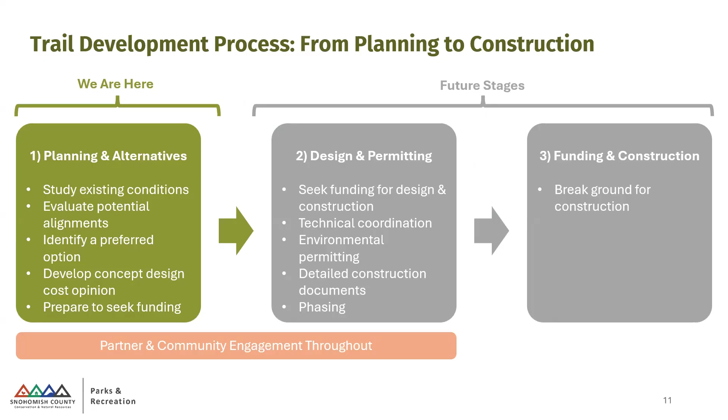So what is the vision for this trail? The county and its partners are seeing this trail as something that can serve for both recreation and active travel. A trail that connects people to nature and scenic views and important destinations, and a trail that respects neighbors, farms, and local businesses. What other things do you think should be a part of this project vision?

I think our next poll is, so actually first we're asking you to rank those in order of importance.

All right, let's see if I can interpret this. Can't share the poll yet, but the little slider bars are moving around. It's actually looking pretty even right now. All three are looking pretty even. Maybe a trail that respects neighbors, farms, and local businesses is a little ahead. I'm not able to share it yet. We'll move on. Oh, here we go, share results.

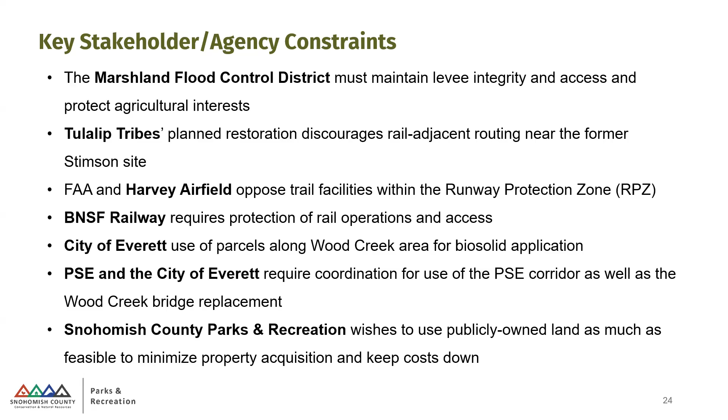So that was a lot. I'll pause here and see if people have questions on the content we've presented so far. In the next phase, we'll jump into talking about the actual alignments. But if you have any questions about what we've covered, put those in the chat and Dustin will help field those.

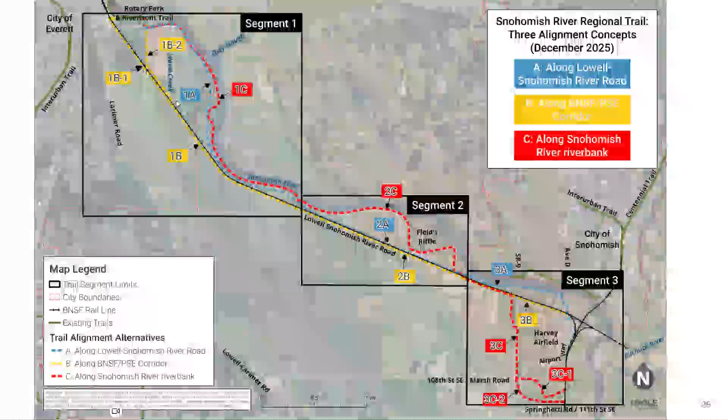I forgot to give you an overview. There's Rotary Park up above, and there's that bridge I mentioned that the city is planning to update. One of the big issues we have is a crossing there — if we went this way, we would need to cross that stream. Then coming along here, SR9 is down here, then Harvey Airfield, and crossing over into Snohomish.

So we're talking about potentially a trail along a roadway — what we'd call a side path — a trail along the river, and a trail in areas that might have sensitive areas. The cross section of the trail would differ depending on location, so we included a few cross sections to give you a sense of what it might look like. There are standards we'd follow, and we'd want as wide a trail as possible while fitting it into the context. So whether that's land use constraints or critical area restraints, the trail width would flex to respond to local conditions.

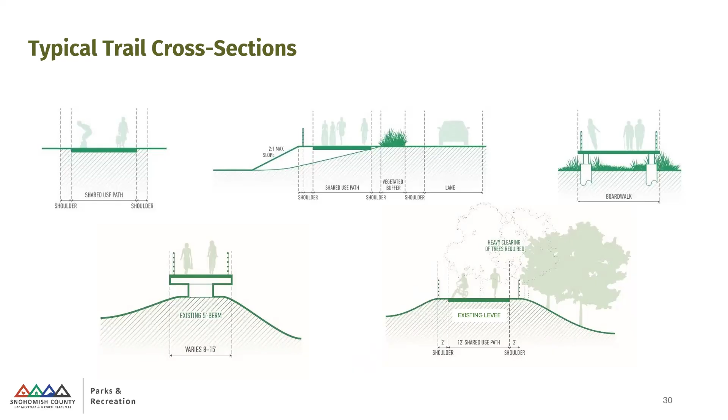Here's what it might look like next to a roadway — there would be a shoulder and then a vegetated buffer, which could be a ditch. In some places the roadway prism wouldn't support the trail as is, so we'd need some fill, but it gives you a sense of the relationship between the travel lanes and the shared use path. A boardwalk would be required where there are critical area impacts, like some wetlands, and a trail could also be on a levee. We didn't put a lot of dimensions on there because it would flex to local conditions.

So we developed these options, and then we worked really hard to develop a methodology for evaluating them. And we ended up with kind of six main evaluation criteria.

So we want alignments that really avoid, and if not avoid, minimize environmental impacts to wetlands and streams. We want an alignment that uses public right-of-way to the degree possible, and is also compatible with land use. We want something that would minimize conflicts with travel lanes, so it wouldn't ask people to cross the road multiple times.

I'm kind of jumping around here. And then something that is feasible and constructible. There's a lot of complexity in trying to get construction vehicles out into these areas and not creating bigger headaches during construction and maintenance. So those are kind of the...

quantitative evaluation criteria. We also really want to factor in what it's like to be on the trail. A trail alongside a roadway is going to be a different experience than a trail alongside the river, so that's something we want to take into account. So not just the scenic quality, but also making sure it feels safe and comfortable for people - that it doesn't feel too isolated, that people are able to get on and off the trail easily, and just feels safe and comfortable.

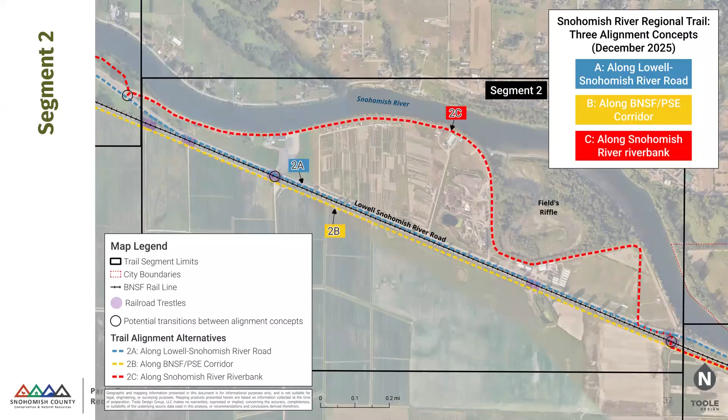But our goal is to get people over to Field's Riffle so that they can have access to the river. So that's one of our thoughts, is we can mix and match, but we definitely want to access these points where people can see and be near the river.

And our final segment, a lot of complexity here as well. I mentioned the airfield—they have this runway protection zone that basically encompasses all of the PSE right of way here, and that is for the safety of airfield operations and for the safety of people.

So they are not keen to have anything coming along this way, although the county owns that. The road is another opportunity. It's narrow here, hasn't been rebuilt like the segment to the west. There are ditches, and the properties come right up to the road edge, so there are a lot of challenges there. We would have that follow the road and then come down across this existing railroad crossing, and connect up with a future Centennial Trail extension somewhere in this area.

Another option that we looked at was peeling off from the PSE right of way and coming alongside SR9. We looked at both sides, but kind of ended up with something along the west side, maybe crossing over to the east side. And then at Marsh Road, a couple of different options for getting to the future Centennial Trail extension. The airfield has some plans to expand, so that's a little bit up in the air.

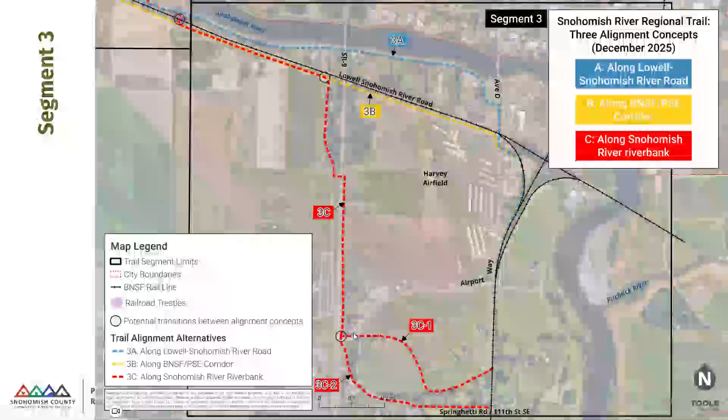If that happens and they were to rebuild the road, Airport Way, there's the option to run the trail alongside Airport Way. We also looked at coming down along some little local roads, Springhetti and 111th Southeast. So those are a couple other options.

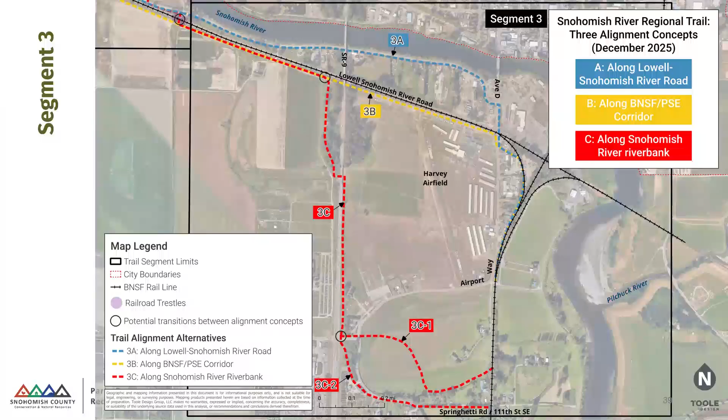Did I miss anything, Dustin? I think you did a pretty good job there. Okay, yeah, great. So that's the overview.

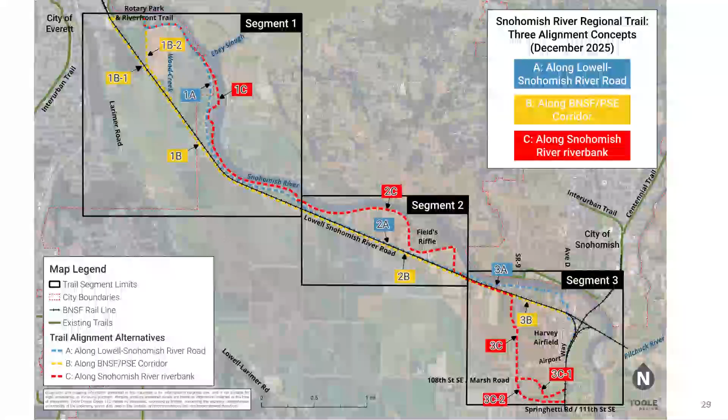Another thing is that these other businesses - people that I know who live right here along the river - if you put that trail right on top of the dike, we're also going to have those same people next to our homes, our businesses, and our barns in our backyard, 20 feet from our homes.

So you'd have to put yourself in my shoes on that one. We wouldn't have any privacy - you're going to have nothing but problems for us. So privacy and security concerns.

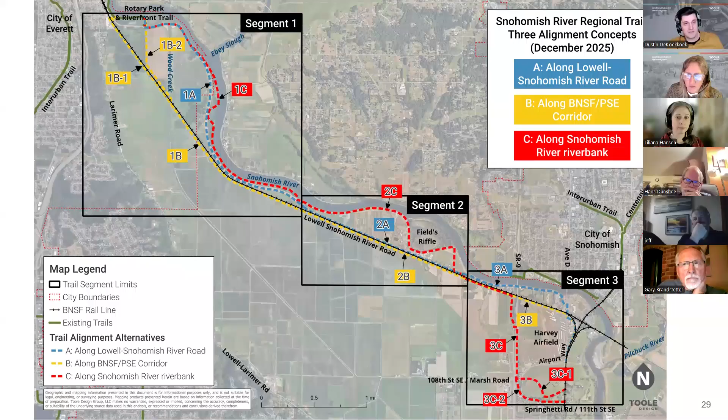Primarily where the red C alignment gets close to the blue A alignment along the road, or where there's existing undercrossings or railroad trestles, it could swap between 2C and 2A. So we noted that, starting out at this higher level and trying to identify the preferred main alignment for each segment. As we get into design, that'll get refined, and we'll consider some of those locations where it could swap back and forth.

There was also discussion on Springhetti Road and 111th, the fact that they're very narrow. I brought up that road segment, and potentially some segments on Lowell Snohomish River Road, may need more than just tacking on a trail to the side of the existing pavement. Some of those areas, the full roadway may need to get rebuilt along with this project.

There were questions about trailhead locations, and I noted that we're looking at those to provide parking and access points along the corridor.

The last thing I'll mention is we had some discussion around the trail user. A commuter, or somebody where this 5-mile segment is part of a longer 60-mile ride, may want to blow through here quickly and want the most straight, direct route. Whereas someone more in it for the recreation, views, and water access would prefer 2C. There's a pretty widespread range of how users want to use the trail, which certainly informs the alignment selection. So I'll leave it at that.

Liliana and Sarah, do you want to report out what your group talked about? Do you want to talk, Sarah, or do you want me to go? I can start, and then you follow up with any specific environmental aspects that I missed.

Some really great comments and wonderful local knowledge from people who've been in the area for years. A lot of comments about salmon recovery and wildlife habitat in general. This is a very important migratory corridor and riparian vegetation area, along with the presence of coyotes, deer, and waterfowl within this area, and the importance of making sure we're considering these species in our design.

There was also mention of hunting presence in some of these areas, like Fields Riffle, and a little touching on amenity options that could potentially be available, like seating, educational signage, trailheads, or trail spurs. So those are some of the user experience aspects that the project team is considering and appreciates additional feedback on. That was some of the higher level pieces that I heard.

But Liliana, anything else to add in? A lot of people touched on concern for the trail impacting wildlife use, especially the north area and Fields Riffle. Those were two pretty important wildlife areas. Yeah, it's great, good information.

I think we also heard from someone on the Snohomish County Agricultural Advisory Board expressing concerns about impacts of a trail alignment running along the south side of the rail line on the nearby agricultural operation. And we also heard from people who live out near the river, who have a venue out there, expressing concerns about trespassing and theft by people along the Lowell Snohomish River Road, and similar concerns about impacts from a trail running in that vicinity.

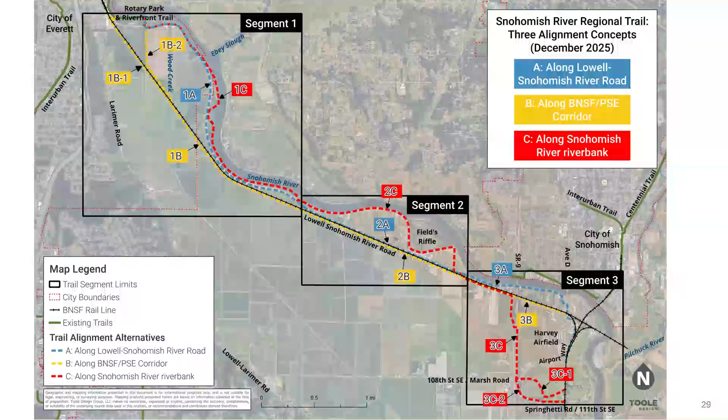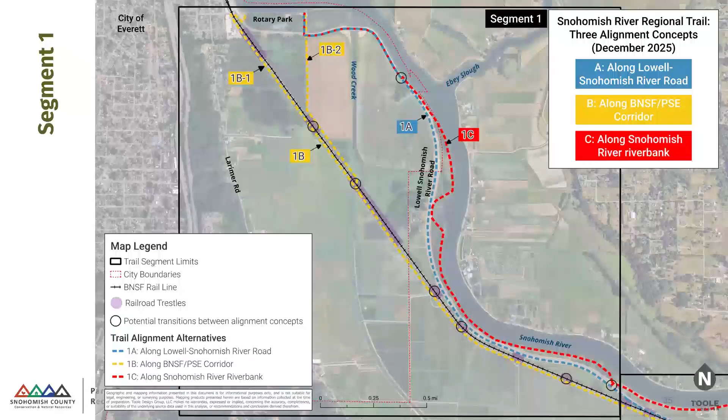Right, I'm going to jump ahead on my slides. Okay, so I wanted to share a little bit about our next steps.

We are continuing engagement and jurisdictional and agency coordination. We're also going to be trying to figure out how to phase this project, break it up into more manageable chunks, and then we'll start gathering more base information - utility coordination, getting a survey, developing base maps, and geotechnical investigations. A lot of environmental documentation is going to need to happen, figuring out storm drainage and floodway things, probably some modeling there, and then helping the county get grants and support them as they get money for funding the project.

All this will help us develop our 30% plans and refined cost opinions. So that is the next phase of the project, starting in January, and it'll go on for about another year or so. So that was phase 2, and I think that is just about it.